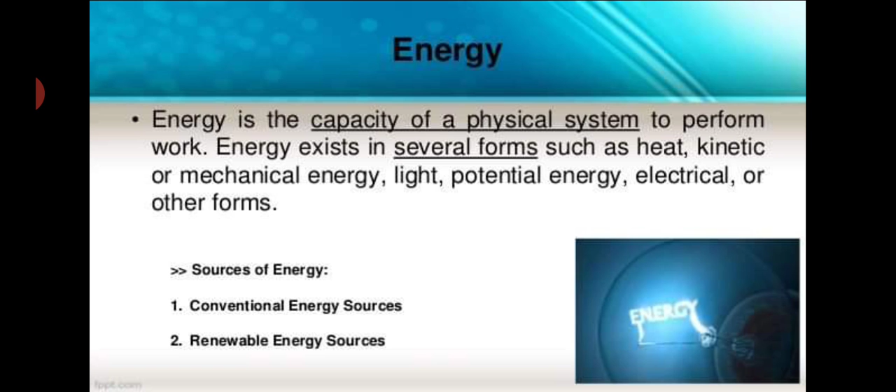What is conventional energy? The term conventional means not unusual or extreme, or ordinary. Conventional energy sources are the traditional sources of energy like coal and petroleum. Conventional energy sources are finite. They will not last forever.

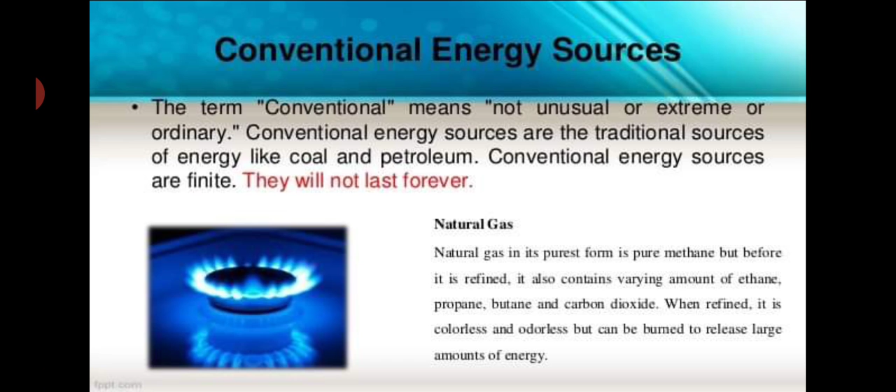Coal. Coal releases a large amount of energy when it is burned because of the density of hydrocarbons in the material. Coal is formed by dead plants being put under significant pressure and temperature for millions of years. There are four grades of coal: lignite, subbituminous, bituminous, and anthracite. Bituminous coal is the best for releasing energy and is the most commonly mined type of coal.

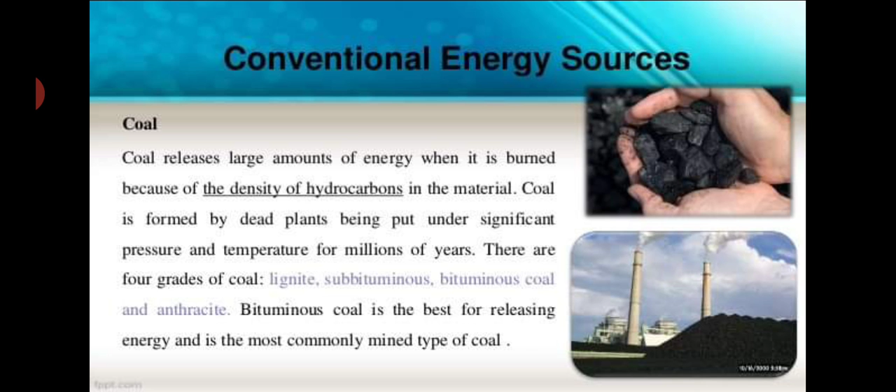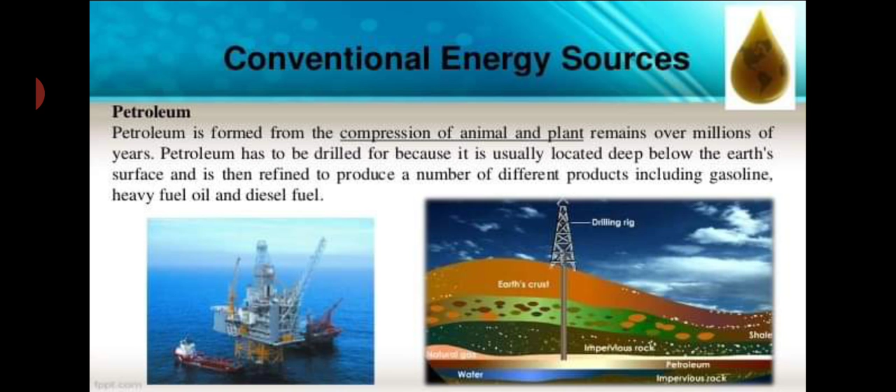Conventional energy sources. The very first source is petroleum. Petroleum is formed from the compression of animal and plant remains over millions of years. Petroleum has to be drilled for because it is usually located deep below the earth's surface, and is then refined to produce a number of different products including gasoline, heavy fuel and diesel.

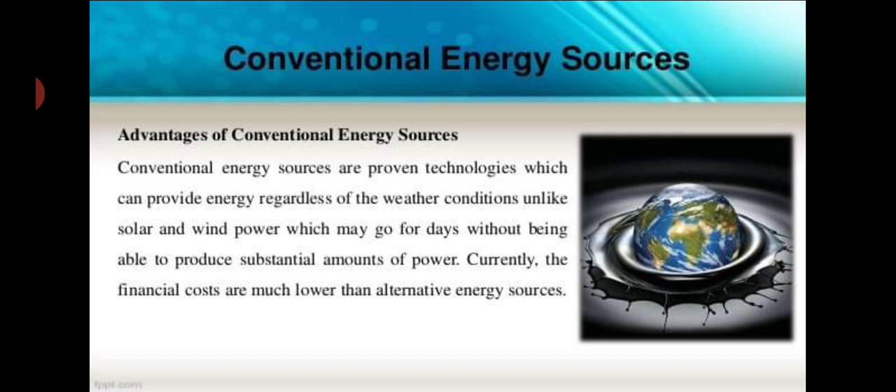Advantages of conventional energy sources. These sources are proven technologies which can provide energy regardless of the weather condition, unlike solar and wind power, which may go for days without being able to produce a substantial amount of power. Currently, the financial costs are much lower than alternative energy sources.

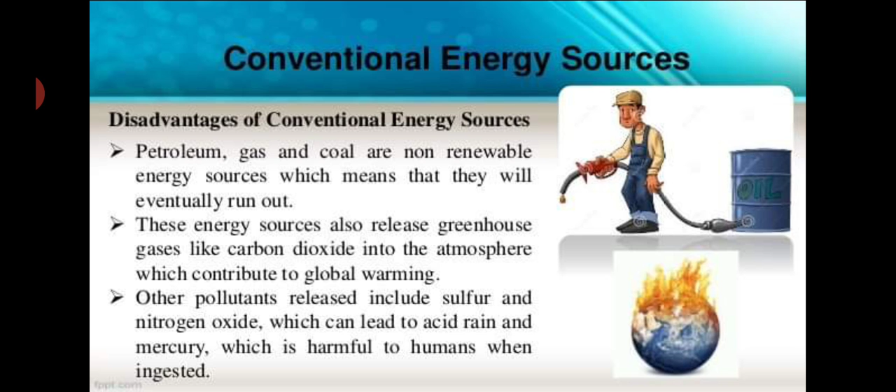Disadvantages of conventional energy. Petroleum, gas and coal are non-renewable energy sources, which means they will eventually run out. These energy resources also release greenhouse gases like carbon dioxide into the atmosphere, which is very harmful. Other pollutants released include sulfur and nitrogen oxides, which can lead to acid rain, and mercury, which is harmful for humans.

Renewable energy sources, which is the other form of energy. This is natural energy which does have an unlimited supply. Renewable energy can be used again and again and will never run out. This type of energy comes from natural sources like sunlight, wind, rain, tides and geothermal heat. This energy is an alternative to fossil fuels and nuclear power and was commonly called alternative energy.

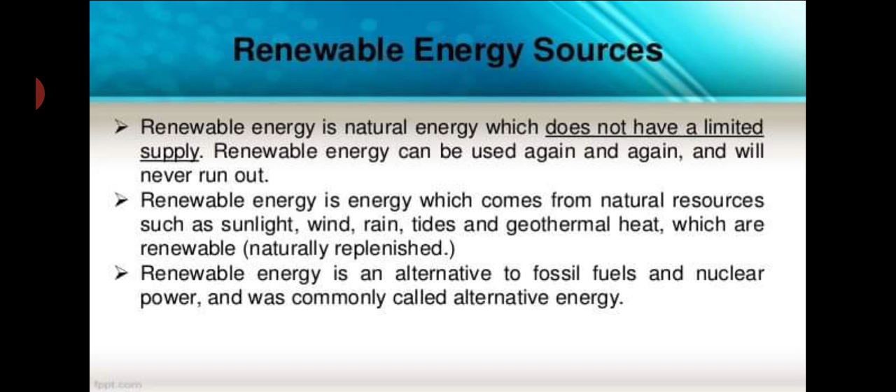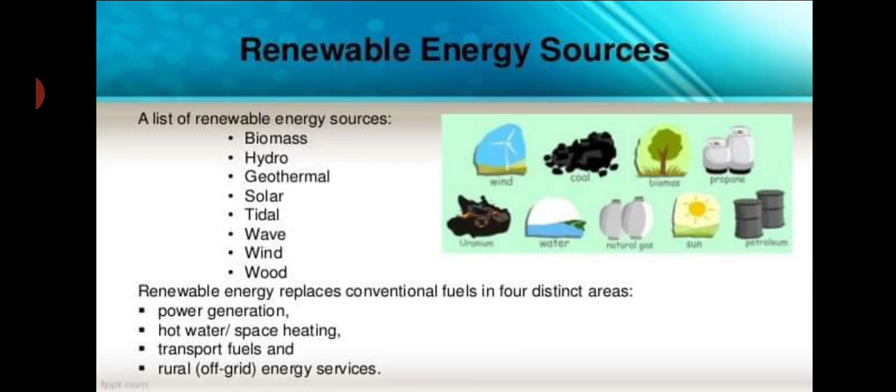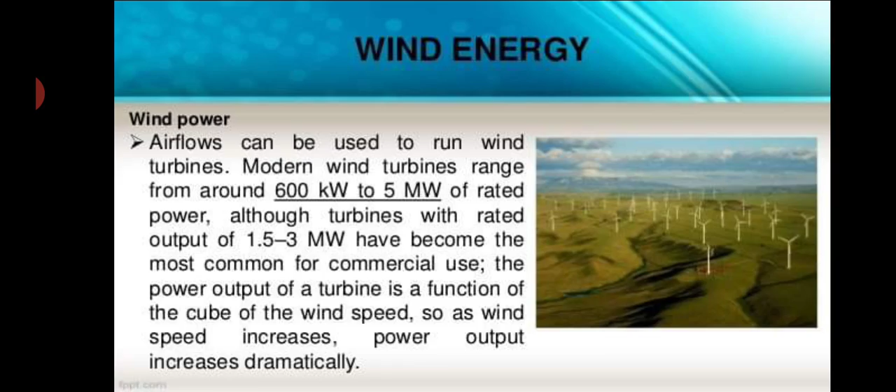Let's talk about wind energy. Airflows can be used to run wind turbines. You must have seen these turbines. Modern wind turbines range from around 600 kW to 5 MW of rated power. The power output of a turbine is a function of the cube of the wind speed, so as wind speed increases, power output increases dramatically. Areas where winds are stronger and more constant, such as offshore and high altitude sites, are preferred locations for wind farms.

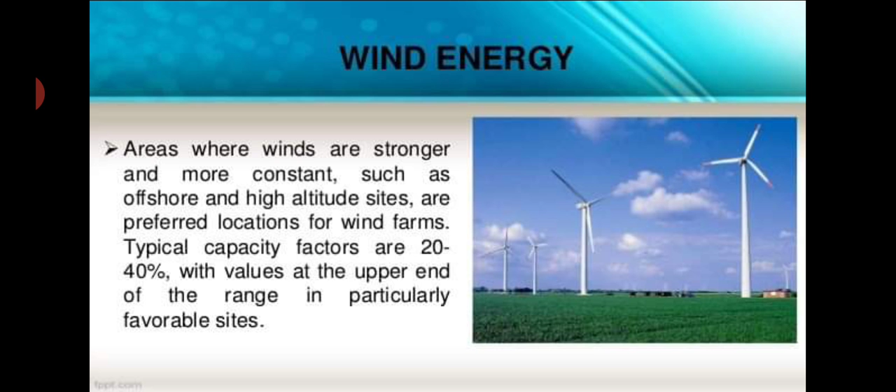Hydropower. Energy in water can be harnessed and used. Hydro means water. Since water is about 800 times denser than air, even a slow flowing stream of water or moderate sea swell can yield a considerable amount of energy. There are many forms of water energy which we will talk about in our sessions.